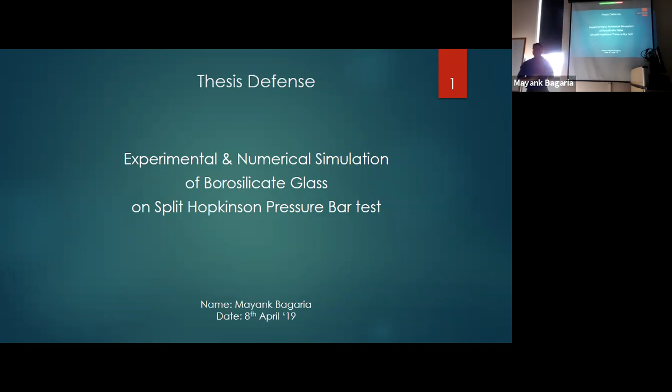I'd like to thank my advisors first. Because of these professors, I was able to incorporate a lot of materials in my research work - the dynamics of material, experimental stuff, and simulation stuff. I'll start off by thanking Professor Odegard for giving me such an exciting opportunity to work on this project. He gave me flexibility to work on my ideas, as well as keeping me on path.

I'd like to thank Dr. Morse for always being there in my presentations, helping me out with what should be the next step, how should I carry out the work. He challenged my views, which made me think out of the box, and I really enjoyed working with him.

I'd like to thank Dr. Miskioglu for teaching me how to do the split Hopkinson pressure bar test. I kept on breaking his instrument and he was very calm about it. I'd really like to thank him for giving me the keys to the lab. I had an amazing time there doing the work, and I felt that I actually contributed to the scientific community.

This project is under the US Bureau of Reclamation. Chrissy is the representative from that side. We always have a bi-weekly presentation for this project, and she has been helping me out with what exactly is the requirement of USBR and how we should move about it. It's been great working with her, and I realized what things I should work on for these presentations.

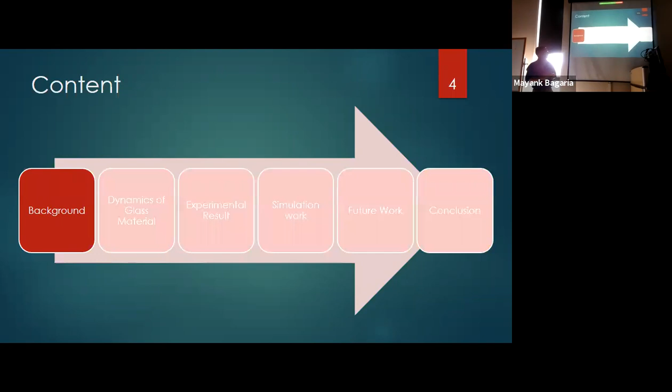First we'll start with the background of this project. As you can see, this is the supply chain of the transmission line that we have. The power is generated here and stepped up in this transformer. The high voltage is ensured in this transmission line, because that way the transmission loss is minimized, and there is a transformer which steps it down.

There are bushings like this which ensure that it is placed and guided properly, as well as for the safety of the power lines. Because of the functionality of this transformer, it has to be placed at some height. So it is susceptible to, or viewable from, a long distance. So what happened in California was...

Can somebody help me with the change?

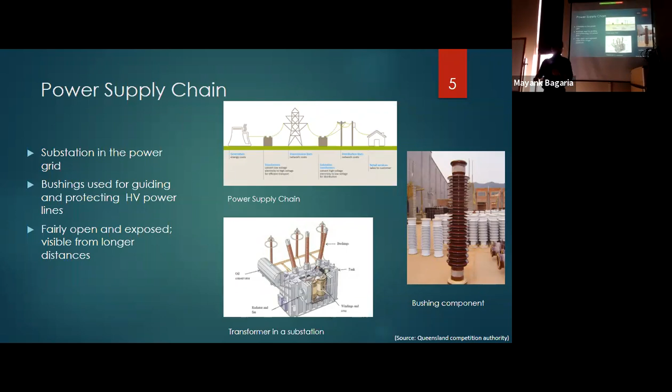So what happened in California was some nuisance creators were targeting the bushing. Because of this, there was a blackout, and because of the firing of the bullet, there were cracks in the glass, which impacted the equipment around it. To bring it back to function, it took around 1 year for the power grids to be restored. So the whole point of this US Bureau of Reclamation research was to create a defense mechanism for this bushing, so that if there is a bullet impact, it doesn't impact the other surrounding elements.

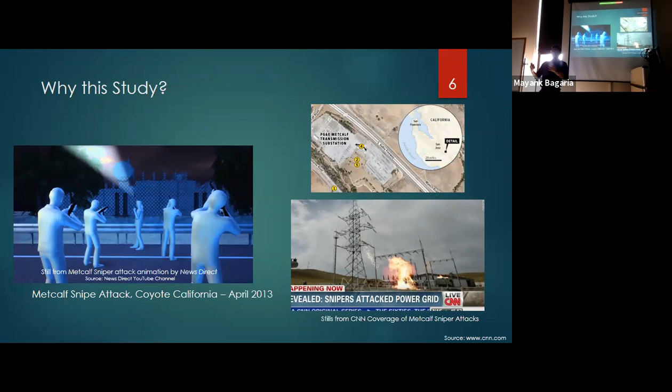So what USBR did is conduct a test. This is the setup of the test which was conducted. There is a cylindrical setup, and the glass used is borosilicate glass. It had the provision of pressurizing internally, and there was a 0.22 caliber bullet which was fired, and this whole thing was viewed from a high-speed camera.

So as you can see, these are the pictures we got from the high-speed camera. The top 4 photographs are for no pressure, and the bottom 4 photographs are for 100 psi.

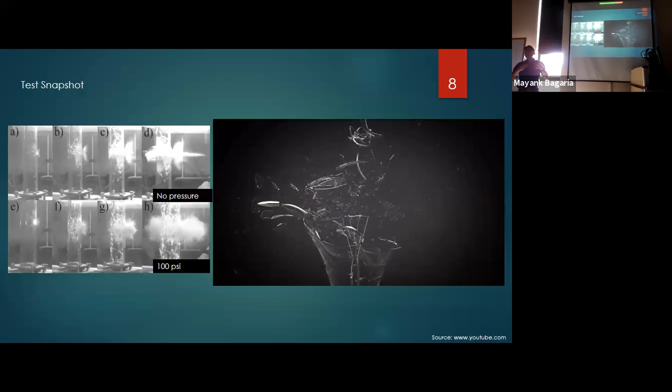Now I'll talk about the 3 observations which were drawn from the photographs from the testing. As you can see, the crack orientation: on impact of the glass, a crack formed throughout the glass, as we saw in the animation. It was radial in the impact zone, and as we move away from the impact zone, it was vertical and horizontal. The damage formed instantaneously as a crack, and the size increased as we move away from the impact zone, as well as when we increase the pressure to 100 psi. So more cracks were generated in that simulation.

The whole idea was that if USBR worked with these kinds of tests to develop a countermeasure, it would take a lot of time and money. So what was suggested was to do FEA. With FEA we could design the countermeasure, and the computing cost implied would be much less.

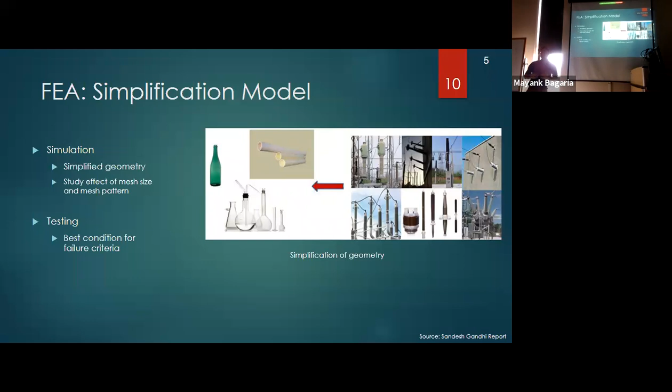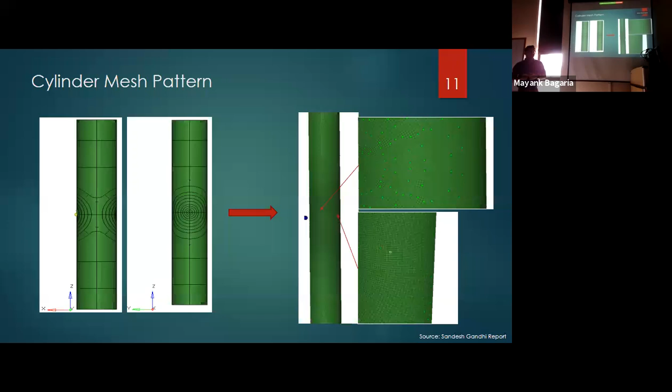The failure criteria chosen was maximum principal strain. The tensile strength was taken and the maximum principal strain was calculated. Based on that calculation, the maximum failure principal strain came out to be 1.094 times 10 to the power of -3.

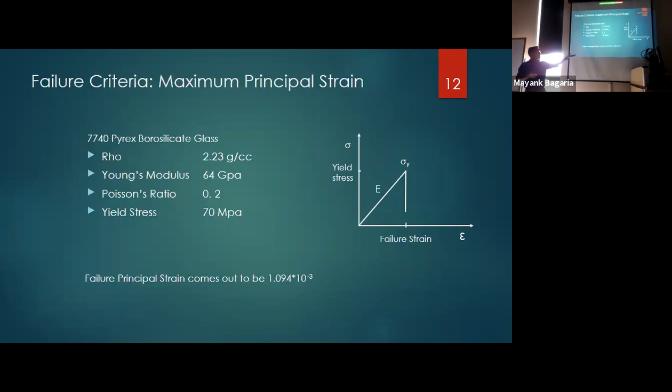So we wanted to know exactly what was happening, and what failure criteria should be chosen. That formed the basis of my work: how the dynamics of the glass material works, and what material parameters should be chosen.

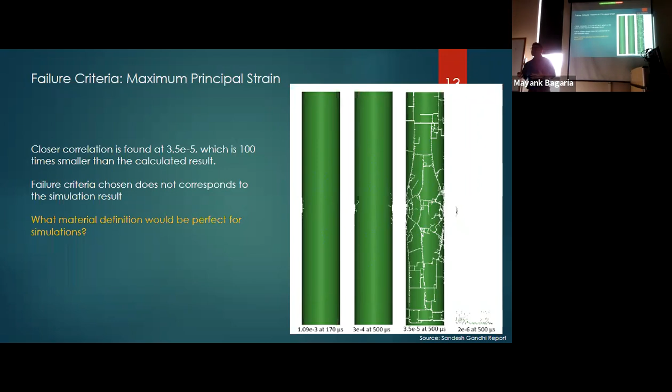That brings us to the dynamics of the glass model. Glass is a brittle material, with negligible expansion when dynamic loading comes onto the sample, and it is governed by hydrostatic pressure. This has been used for armor development because it has a very good high strength-to-mass ratio.

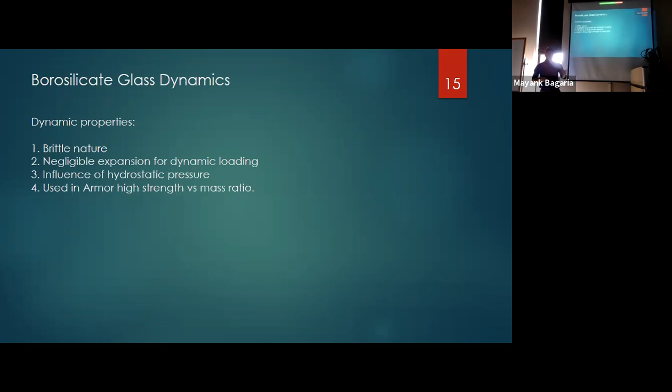Now I'll talk about how the crack propagates in glass. Suppose this is a glass, and there is a bullet impact on it. A compressive wave forms and moves in a radial direction throughout the body of the glass element. If this compressive wave is stronger than the dynamic strength of the material, as the wave propagates it fractures the material and keeps moving. As you can see from the photograph, there are radial cracks that keep propagating, giving a concentric radial circle failure as it moves around.

But if the compressive wave strength is less than the dynamic strength of the material, here's the setup: if a glass impactor strikes this glass target, a compressive wave is formed, as shown here, and it moves through this glass.

As it reaches this surface, it rebounds back as a tensile wave. There is a spall plane in which the tensile force is developed. So when this tensile force is above 70 MPa, there is a failure in that plane. The surrounding element is then governed by this failure criteria of the material, 70 MPa, and it keeps on cracking and propagates throughout the material. So this is what happens if the compressive wave is less than the dynamic strength of the material.

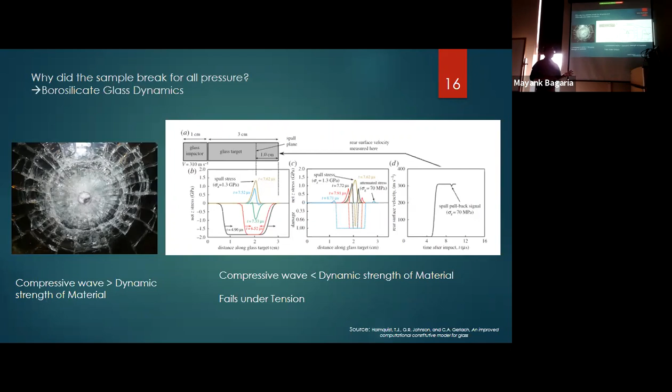Next, I picked up the result from Sandesh Gandhi's report, and I found that it was showing a very beautiful feature observed in the dynamics of the material as well. I would say they did a really great job finalizing the mesh pattern and mesh size. So this is how it looked if there is a bullet impact and it moved radially.

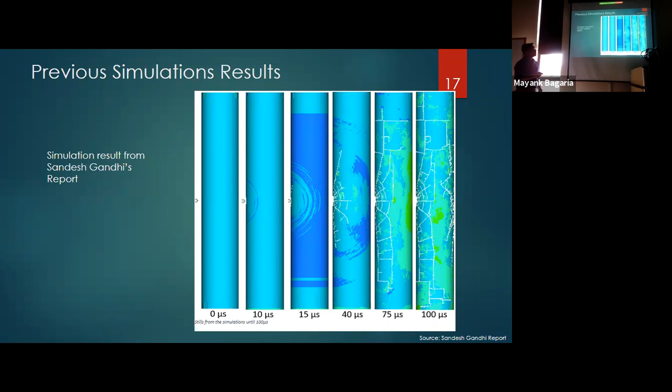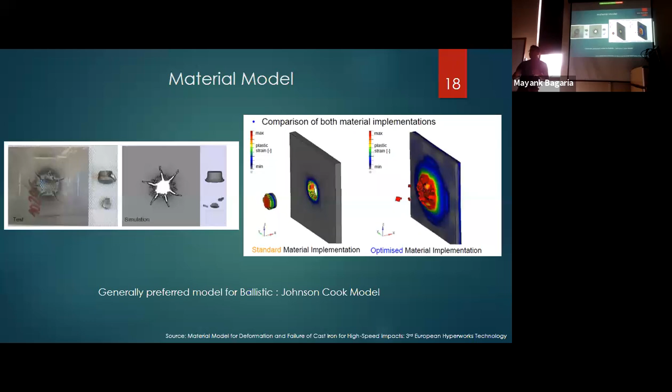So I looked into why the material card is important. There was a test which was conducted, and a simulation conducted for the same kind of testing, where the material card is incorporated to ensure the material property is captured. When a general material was taken, it behaved in this format, but when the model that actually captures all the behavior of the material was used, it gave a good correlation between the actual testing and the simulation. The model used in this work was the Johnson-Cook model, which is really regarded as the standard for any ballistic impacts.

Next. So my work in simulation has been done in Hypermesh and LS-DYNA. All the pre-processing is done in Hypermesh, and the post-processing is done in LS-DYNA.

The way LS-DYNA works is based on the material card. What the material card does is specify the material property to be incorporated in the model. So I went on to deciding which material card would be best to take into consideration all the requirements of our testing.

LS-DYNA has around 294 material cards. What we did is find the material card which is strain rate dependent, then which strain rate dependent card is based on the Johnson-Cook model, and which Johnson-Cook model is based on the glass model, and this gave us the model that would best fit the scenario in our case.

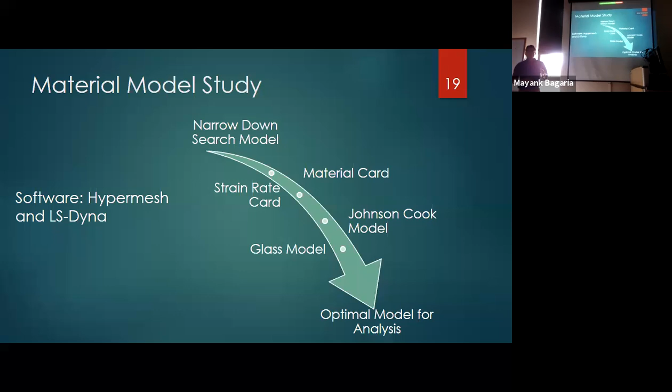Next, these were the 6 cards which take into account these kinds of behavior. Card 032 was based on laminated glass, used for simulation in car windows. 60 was taken for high temperature forming. Material 110 is the material card best for us. 241 was the older version of it; Material 110 is the new version. 241 is used for taking into consideration the Bauschinger effect, like tensile loading and compressive loading, i.e. cyclic loading. And 280 was not based on a strain rate card.

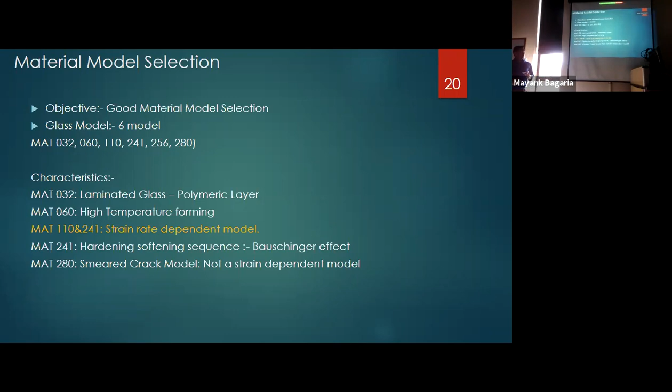Now I'll talk about why 110 is best suited for us. The 110 card, the Johnson-Holmquist card, was developed specifically for taking into consideration ceramics under ballistic impact. It takes into account the strain rate effect. The failure of the material is based on the failed material around it, which makes it less mesh intensive. Tension is handled differently from compressive strength, as we've seen in the dynamics of material—tensile strength differs from compressive strength—and the card also ensures that element position plays a role in the simulation. So this card was best suited for our case.

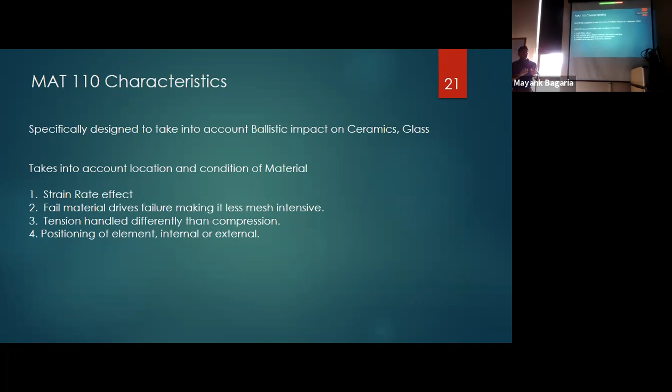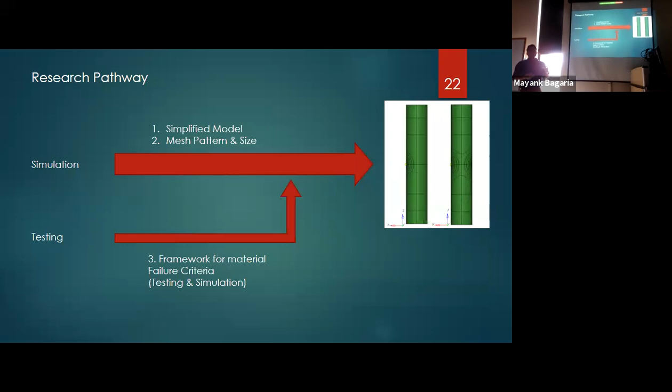So the methodology chosen for this development was that a simplified model and mesh pattern size—good work was done before it—so we have a good simulation model. Based on the testing, we would have a framework of material failure criteria, which would be fed into the model we have, and that would give us a good result. So this is the whole idea of this project.

Instead of incorporating the material model directly into the model, it might take into account a lot of parameters which we cannot account for. So instead, the testing apparatus was simulated separately so that we don't have a lot of variables, and it simplifies our material model. Based on this material model definition, we'll feed that into the old model and get a good correlation. This is the methodology followed in this research.

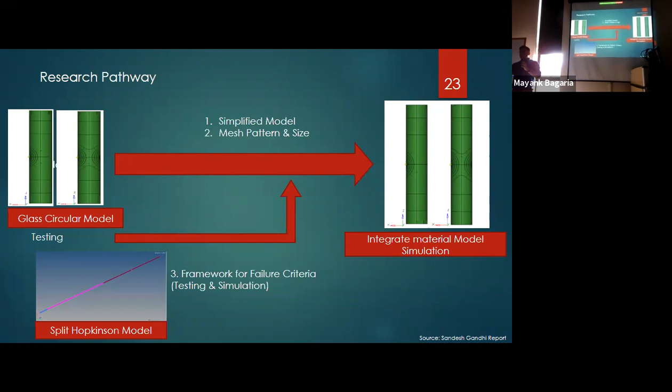So now we'll go on to the experimental results.

So what is basically strain rate? What happens is, if there is a car accident or sportsmen who go into contact sports or something, the loading which comes into play in this kind of scenario is the strain rate model.

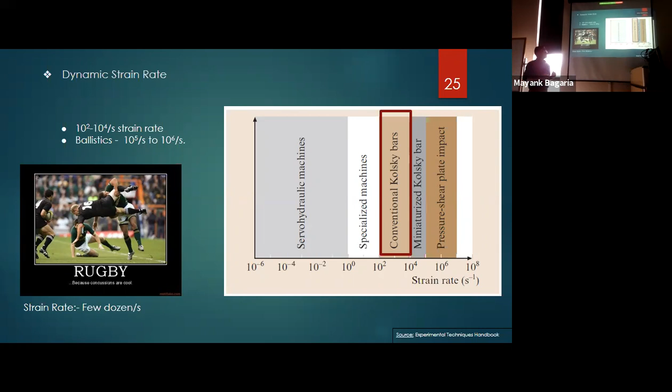A lot of apparatus exists for experimental testing based on the strain rate it takes into account. Servo hydraulic machines are used for strain rates of 10^-6 to 10^0. Specialized machines or modified split Hopkinson tests are used for 10^0 to 10^2. Split Hopkinson test is best suited for 10^2 to 10^4, and plate impact is used for strain rates above 10^6. For ballistic impact, the strain rate involved is in the range of 10^6.

We have selected the split Hopkinson test for our testing, and this is how the schematics of the split Hopkinson pressure bar test look like.

What happens is a striker bar strikes the incident bar, and there is a sample and a transmission bar. I will show you exactly what happens. This is the animation from my simulation, and this is how it begins.

When the striker bar strikes the incident bar, a compressive wave is formed which moves into the sample, which is called the loading curve. There is a strain gauge which calculates the strain coming in, which is the loading curve.

When it impacts the sample, some of the wave is transmitted and some is reflected back. Based on the analysis of these three curves, we get an idea of how the test was conducted and what kind of stress and strain came into the sample.

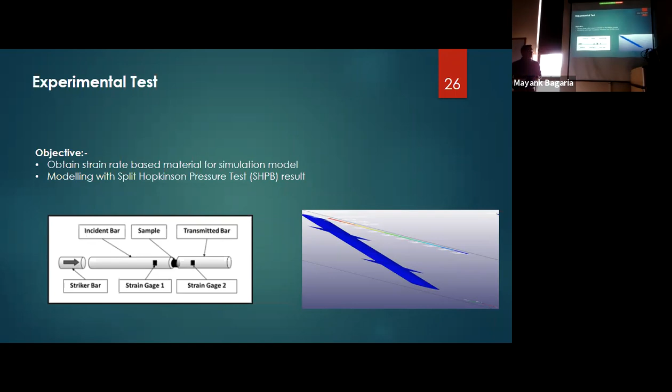So this is how it looks like. The compression wave is formed, and when it impacts the sample, some of the wave is reflected back and some is transmitted. This is how the split Hopkinson test is going on. This is what is actually happening.

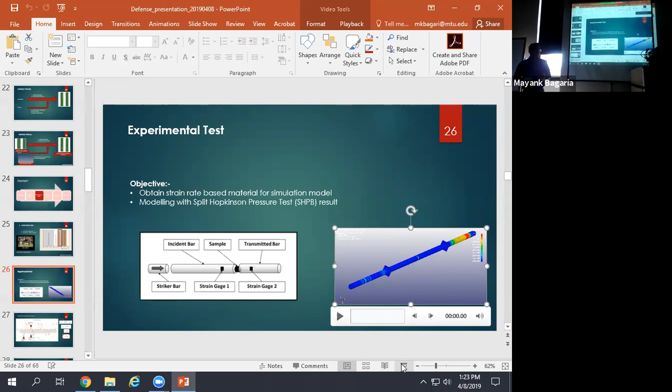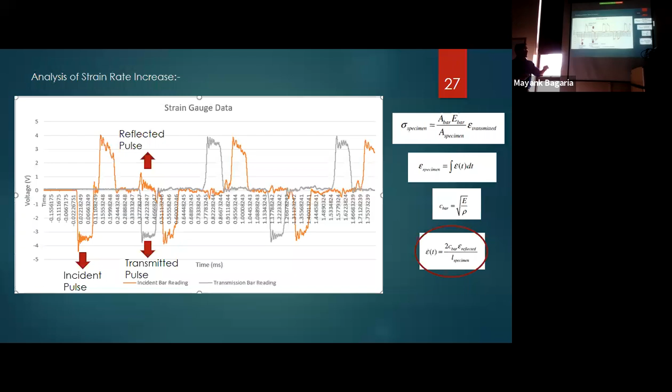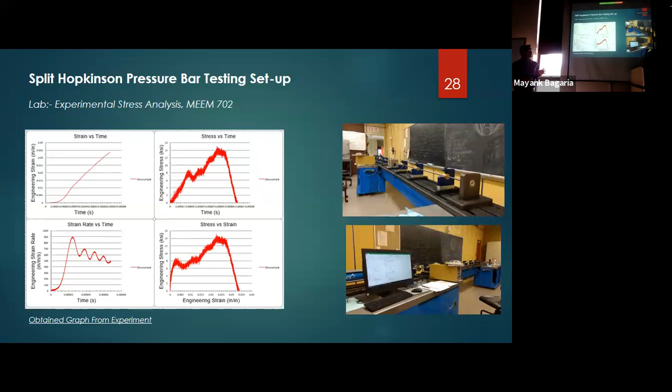We have one of the best setups for split Hopkinson test in our MEEM facility. I used the MEEM 702 test setup, a split Hopkinson pressure bar test, for my testing.

So the whole methodology of doing the experimental test was based on this. I tried to find out if we had any borosilicate glass testing results from any literature. What I found out was that there was very little literature on that.

So to have good knowledge that we are doing the test correctly, what I did first was conduct the test on steel samples, which had very good literature on what would happen in a split Hopkinson test. This helped validate our test methods, the analysis that needs to be carried out, and the experimental setup, giving us a good idea of how exactly we should be doing the split Hopkinson test.

Then the learnings from the steel samples were carried over to the glass samples. The results for the glass sample were then correlated with a similar class of material to check that we were getting credible results.

Let's start with the test results for steel samples. This is how the setup looks like. We have taken 1018 cold rolled steel, and the test apparatus used is the split Hopkinson pressure bar test.

We have taken the same dimension of the sample that was used in the glass sample, because it would give us one less variable to deal with. So the input parameter which comes into play in this testing is pressure. By changing the pressure, we are able to change the velocity of the striker bar, which determines the loading curve of the testing. The striker length was chosen as 9-inch, and we kept it constant to reduce any other variable. The number of samples we tested was 2 samples each.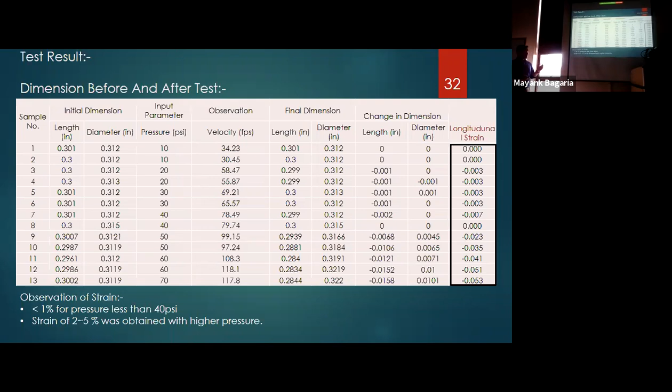So by looking at the strain, what we found out is that for pressure less than 40 psi, we get a strain of less than 1%. And for pressure above 40 psi, which is from 40 to 70, we got a strain of 2 to 5%. That result was tested for.

That result was compared to the analysis result we get from the experimental setup, and we found that it very closely related to that. We saw that the average strain was increasing with increase in pressure as expected, and the strain was less than 1% for 40 psi and 2 to 4% for pressure in 40 to 70 psi.

So average stress has to be taken for analysis. And with the increase in pressure, there was not a significant increase in the average strain rate as well.

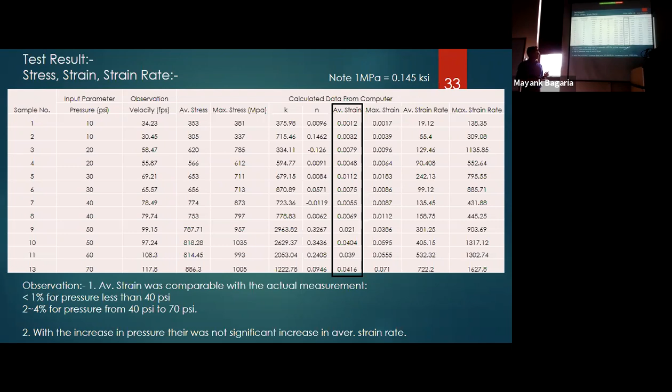This result was compared to the result from the literature, and we found that we were able to match up the result in this yellow segment. The strain rate which was possible by these pressure changes came out to be 700 per second. So we were able to simulate this small region.

But the split Hopkinson test has a potential of checking the strain rate for this box. What was suggested in that paper was that maybe we can change the L/D ratio, and by that we can get a higher strain rate without changing a lot in pressure.

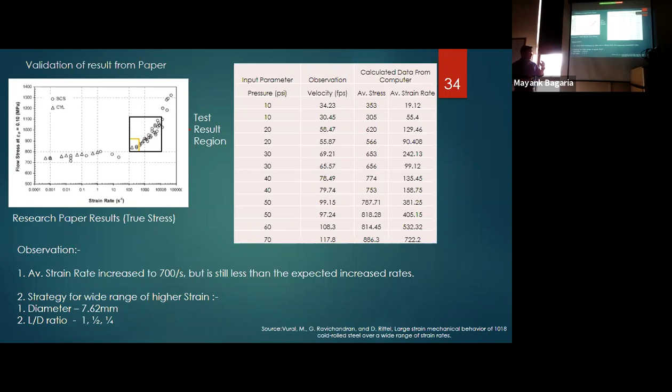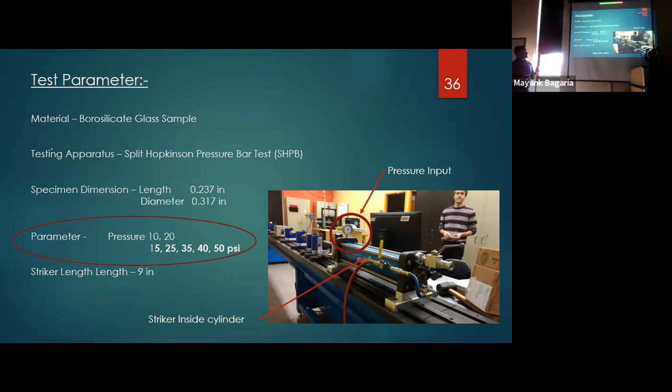So after having a good understanding of how the test is performing and how to analyze the result, the same tests were carried out for the glass samples. The same setup was used, everything was the same. The parameter which was changed for this setup was the pressure, which was changed from 10 to 50 psi, and everything was kept the same. So these were the results we got from the testing.

So these are the average stress, the average strain, and the strain rate. We found that all these samples broke when the test was carried out, and the strain on the sample was in the range of 1 to 2%.

There is a constant increase in the average stress as we increase the pressure, as we increase the strain rate. The strain rate observed in the sample was in the range of 100 to 250. So we failed to have a big range for our split Hopkinson test, which might be possible for it. There were some constraints with the number of samples we can obtain. So we kept this result and moved forward.

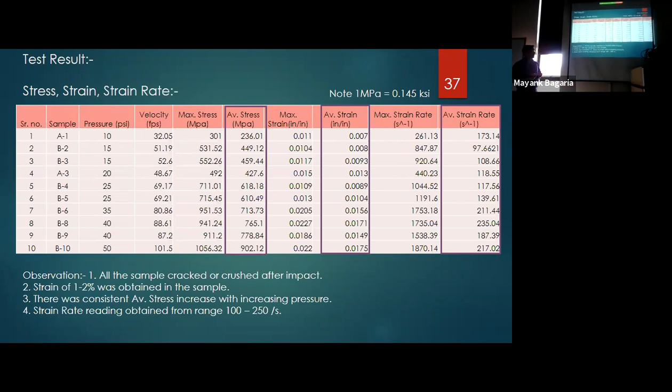So this is how the result looks like. This is the average stress versus strain rate curve, and as you can see, there is a good correlation between the average stress and the strain rate. This is how it looks in the logarithmic scale.

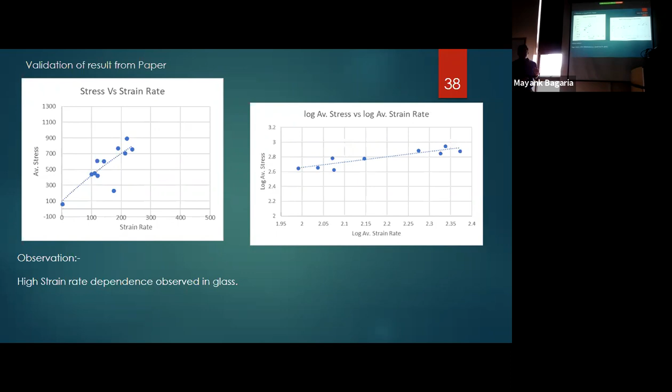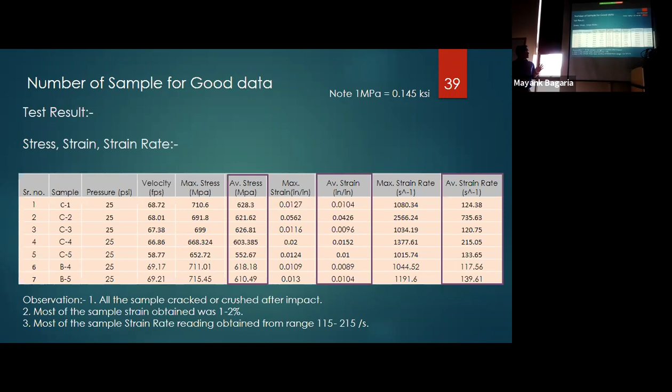Since glass is a brittle material, we were not sure if the two samples we have were a good representative of this study. So what we did is we took 7 tests under the same pressure criteria, and we calculated the average stress, average strain, and the strain rate, and these were all plotted. We found the same kind of result, that the average strain in the sample was coming out in the range of 1 to 2%, and most of the sample strain rate was in the range of 115 to 215.

The reason which might have impacted this test was that if we consider this as the incident bar and this as the transmitted bar, so if there is a non-parallel face in the sample, what will happen is if this would have been a metal, there would have been a localized deformation and it would have taken that into account. But since it is a brittle material, there would be stress flowing from that region and a crack propagating, which would give us less stress developed in the sample. That might be the reason for giving us these outlier results.

So I think if we can incorporate high-speed camera correlation into it, so that we see how the crack is propagating, we might have a good understanding of which data is good and which data is not good. So that could be incorporated to give us a good result.

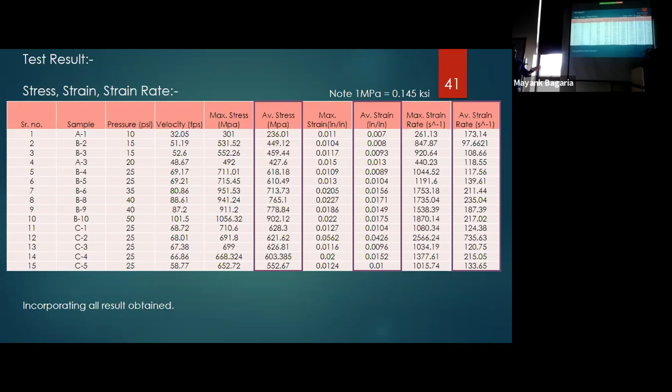As we can see, there is a good correlation between the change in strain rate with the dynamic stress increase. So that is kind of captured in this result as well, and I think we were able to have a good result for this simulation.

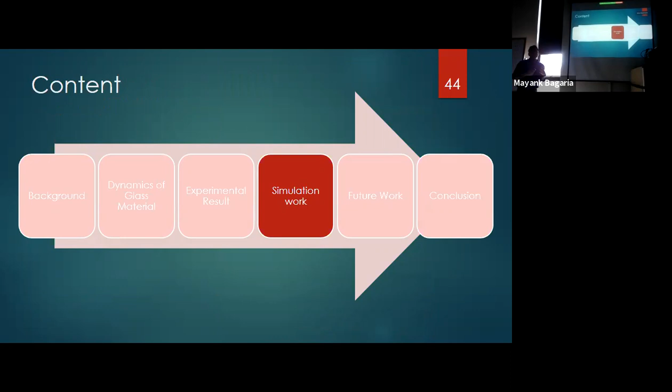Next, I'll talk about what simulation work we did. This is how the test looked like in 3 different scenarios. The first one is the actual testing. So this is how it looks. It cannot be visualized because the test is so fast.

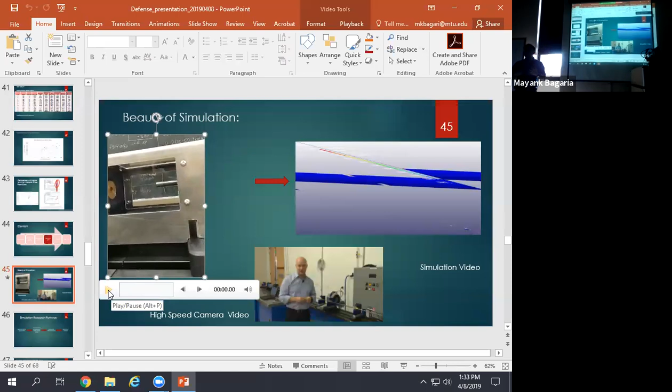I just wanted to give you an idea of how the test is going. The test is going so fast. Now we'll see how it moves, how it looks in high-speed camera.

This is how it looks with high-speed camera correlation, and our simulation was able to capture this behavior. In the middle, there is a sample, and this is the incident bar and this is the transmitted bar.

So it kind of captured the behavior which was generally observed in the split Hopkinson pressure bar test.

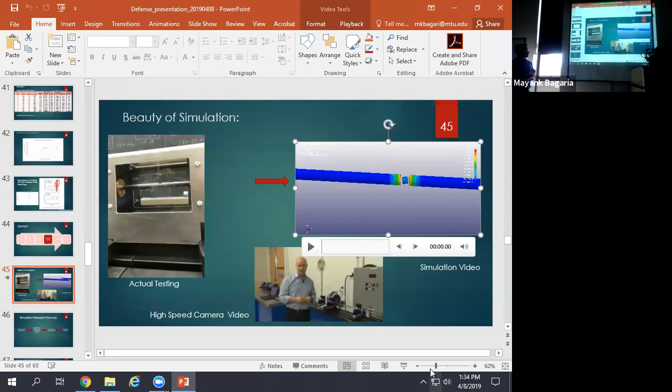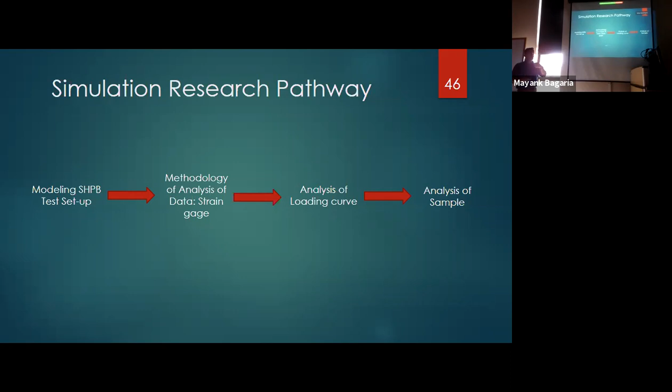The methodology adopted for the simulation work was that first we'll model the split Hopkinson pressure bar test, the same setup in LS-DYNA hypermesh. Then, like the way the experimental setup calculates, taking into account the strain gauge, the methodology of calculation was decided. The analysis of the loading curve was done so that we have a good understanding, so that we're able to correlate the same result from the experimental to simulation, and then the analysis of the sample was carried out.

This is how the schematics of the split Hopkinson pressure bar test looks like: the striker bar, incident bar, the strain gauge, a sample in the middle, and the incident bar and transmitted bar. This is how it looks in the simulation.

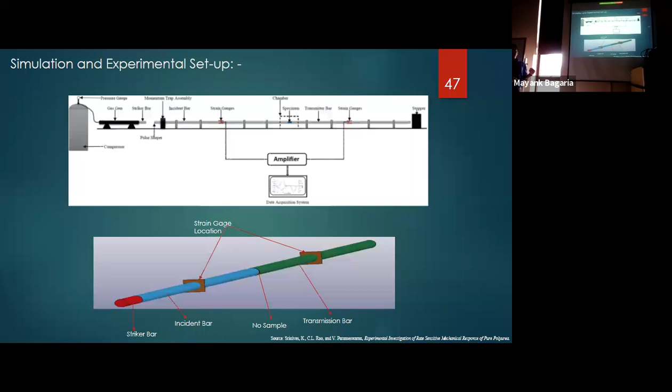So what we did is we took the striker bar, the incident bar, and there is a sample in the middle, the strain gauge location is positioned, and this is the transmission bar.

The cards which we incorporated into our simulation were that we took into consideration what is actually happening in the experiment by giving velocity to all the nodes of the striker bar to correlate with the striker behavior.

Gravity is applied to the whole setup, but since the test is so fast, gravity doesn't play a very big role in this.

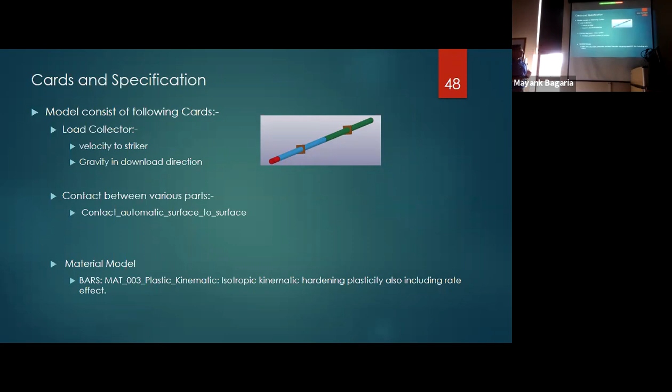The contact taken was automatic surface-to-surface contact between the striker bar to incident bar to sample, and sample to transmission bar. The material model selected for the bars was 003, because we are not expecting any plastic strain to happen in that bar. Hopefully it didn't happen either.

Next, this is the position of the strain gauge. So the way we carried out the strain gauge analysis was next.

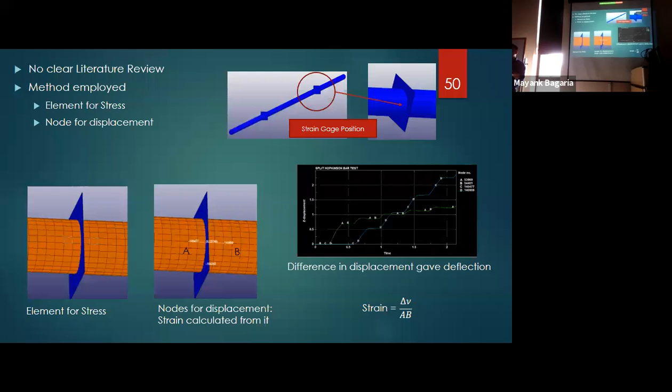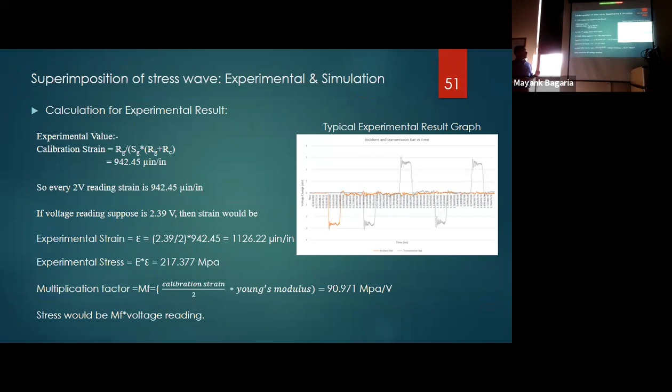So this is the result we got from the split Hopkinson pressure bar test. If there is no sample, this is all the calculation that goes behind it. I'll not go into detail for this, but this is what we do. So what we do is we have a voltage versus time curve for the strain gauge, and this is converted to the stress versus time curve.

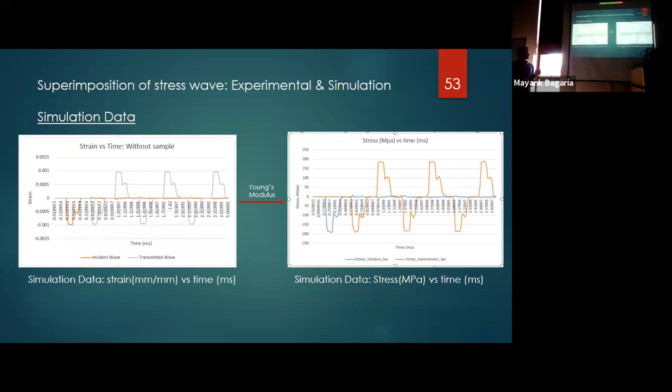The same methodology was adopted for the simulation results as well. So we have the strain versus time curve, and this value was converted to stress versus time curve. And now we superimpose the two results.

As you can see, we are getting a very good correlation in the time axis, it superimposed very nicely. It was very improbable that we would get the same kind of result for the transmission bar, but we got a very good result. And we have an idea of how the loading curve is coming, so that we can understand how it will impact the sample results. So this is how it looks. It had a difference of 20%. This is the transmission bar result, and this is the incident bar result.

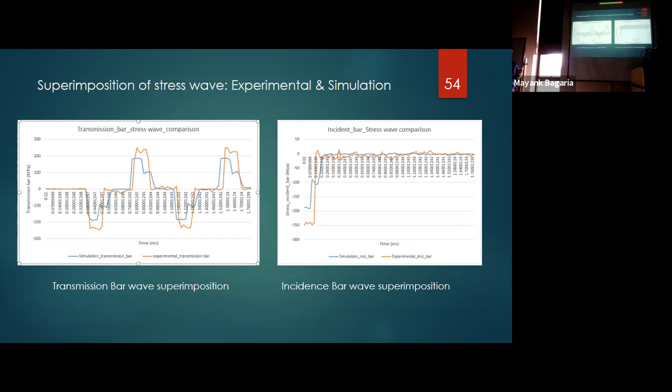So we wanted to make sure that mesh is not the issue creating the difference in the loading curve that we saw in the last slide. So what we did is we did the mesh consistency study.

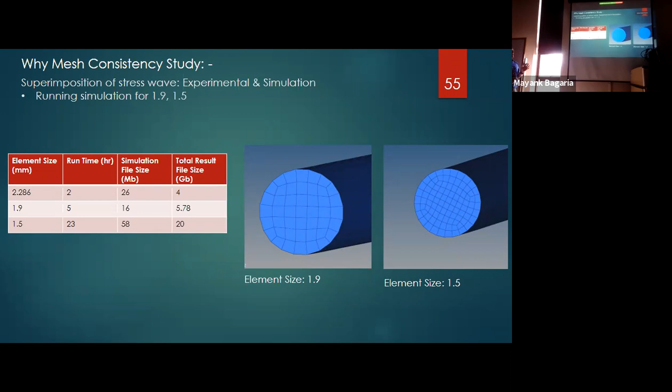Initially the mesh size was 2.3, so we reduced it to 1.9 and 1.5, and the same method was used of superimposing the graph. So this is what we found out, that there was no difference in the result. So it means that the mesh of 2.3 is sufficient to categorize the result that we have, and we went on using the 2.3 millimeter mesh size.

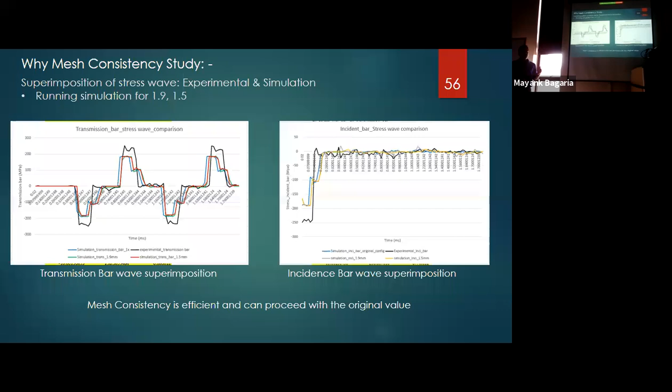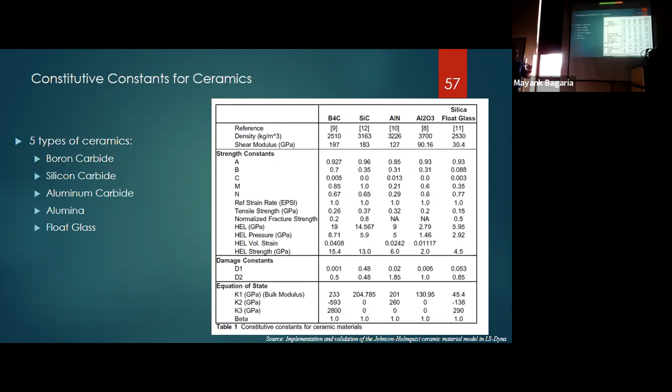So after having a good understanding of how the loading curve is behaving, we wanted to move forward with the analysis of samples. So what we did is we found out the material model used, and these 5 ceramics were used, which is from the family of ceramics we are using. I also found out that the glass material we are trying to simulate is one of the difficult ones to simulate, because it has 19 constants, and if there is a slight shift, it is very much parameter sensitive. So if there is a slight change in the parameter, there will be a huge impact in the results.

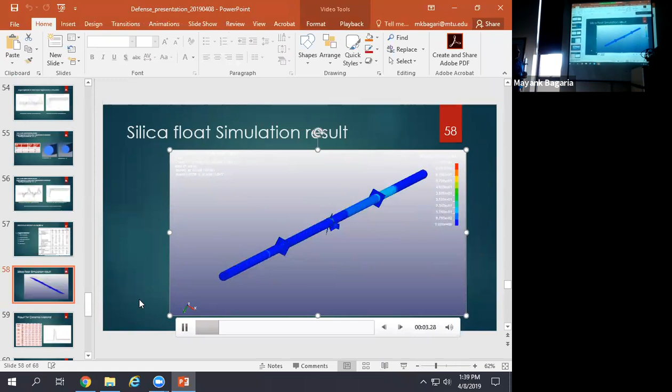So what we did is we tested the sample, and as we have seen in the experimental setup that it always broke, we were able to have the same behavior for the simulation as well. So it kind of cracked like this.

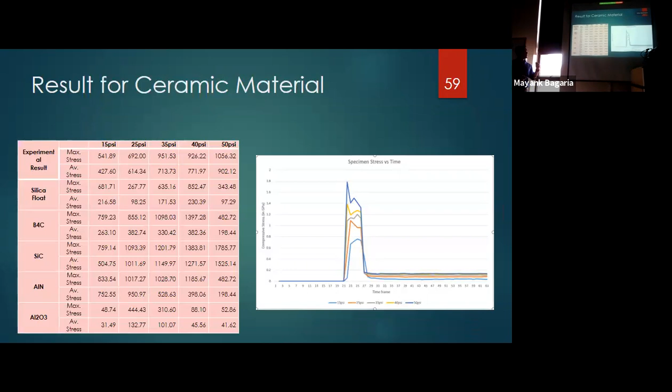So the simulation was carried out for these 5 materials. What we found was the maximum stress and the average stress, and this is how the loading in the sample looked like. This curve is for the silicon carbide, this is for 15 pressure, 25 pressure, 35 pressure. What I mean by pressure is the input velocity which comes into play. And this is the simulation result we were getting.

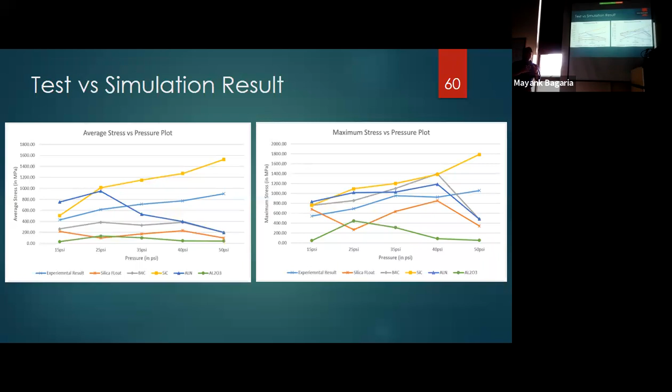So if we plot that curve in our result, this is the experimental result we got, and this is the simulation result we got for different pressures. The expectation was that we'd get some parallel lines for the testing, but it didn't give us the result we were expecting. What it gave us was these kind of curves. So it was kind of a question of what exactly could have been carried out to give us a good correlation, what needs to be incorporated in the testing and the simulation side to have a good correlation.

The model 110 is developed for ballistic impact, so it's best if designed in this region. The data we obtained was in this region, so if we're able to incorporate the result from this region, we'll have a good correlation, and this is what would be expected in ballistic impacts as well.

The way we can do it, as we've seen, is by changing the L/D ratio. Maybe if we have image correlation with a high-speed camera, we'd have a good correlation, as well as determining the sample size, so that we have good data and a good understanding of what the data is doing.

The factors which can be incorporated in the simulation are that we need to understand how the material model parameters are changing, how the result is changing with respect to the material with the change in the material model parameter. The study should be carried out.

A lot of people suggested that if we incorporate shim, they were able to have a good correlation between the loading curve from the testing and the simulation. So maybe a shim study could also be carried out to get a better correlation in the loading curve.

What was happening is that when we were doing the testing, for the same loading curve we were getting like 10,000 results for the analysis of data, but the simulation was only having 10 data points. We tried to incorporate different methods to reduce this time step, but we were not able to do it. I think LS-DYNA works in a very different way—it chooses its own time step and is not able to incorporate that. So maybe different software could be incorporated for capturing that kind of time step study.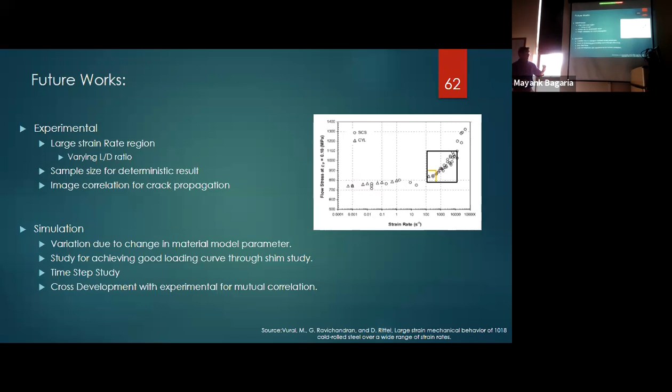On the whole, this was the achievement of my project. I was able to incorporate the dynamics of material, experimental analysis, and the simulation result. So the work I did provides a framework—like if there's a ballistic impact, how exactly can we do testing and how can we incorporate the simulation work into it, providing a cheaper method of incorporating the material model into our simulation model.

If the countermeasure comes in the form of changing the material, this model could easily be incorporated and would give us a good result. What we need to do is conduct a test in a split Hopkinson test, try to simulate that in simulation, and we'll get a material model which can be fed into the simulation result of the actual model. And if there's a countermeasure in the form of a change of material or optimizing the mesh flow, this could easily be incorporated by having the material model I've developed. So it basically gives: if we have the material model, do the testing, put the simulation model in play, and find out the material model. This is what I have achieved in my project.

Sorry, I have this question. You have the graph with outliers, and then another graph after that which I think had the same X and Y axis but showed a different graph. If you could go to the slide it would help, because it went by so quickly. I think I saw it had the same X and Y axis, the one with outliers. Oh, outliers.

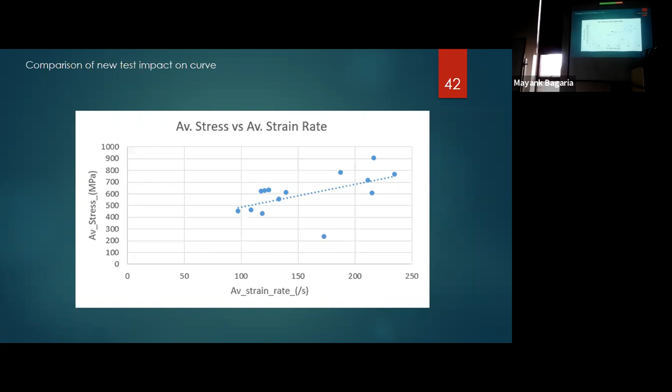I see what you're asking. So what exactly is happening is, I conducted the test and found some outliers. The whole idea was to see why we are getting the outliers. When I found these were the outliers, there was a significant difference between the trend line and the outliers. So I thought maybe if we can conduct the test for the same pressure, for the same input condition, to see what kind of curve we get, because maybe two samples is not a good deterministic study of the actual test. So based on these curves, I conducted this kind of test, and it showed us what exactly is happening. As you can see, there were a lot... and if you see the axis is 540 to 640, whereas this has 0 to 1000, so it might seem like it is being elaborated. That might be the reason why it looks so different from this one.

So what's the significance? Can I interject real quick? This is Chrissy. Maybe you could shed some light on the probabilistic behavior of glass, in the way that it has a large amount of probability in the results. Maybe you can talk about some of the material properties that make that an issue when you're testing glass samples.

Yeah, definitely that's a very good way to explain this. So what Chris is trying to address is that glass is a very different kind of material compared to steel, because of the internal structure. Dr. Morse gave the best definition of glass I could possibly imagine. He said glass is like a compact powder which is put together, and it is just waiting for an impact to happen to disintegrate into pieces. So what it means is that when it is compacted into a small element, there might be defects in the glass sample, and that might produce a site for damage to grow.